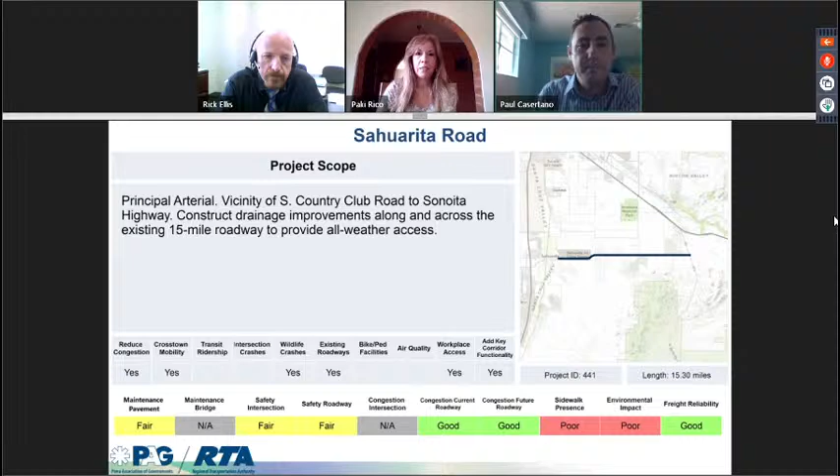The next project is the one that appears, the first one on the link that you received. This is the Twin Peaks Road Rattlesnake Pass expansion. This is a major collector project from the Saguaro Bloom subdivision to Twin Peaks Road.

This aligns with most of the CAC goals and has all but one performance measure available.

The intent of this project is to essentially improve capacity, improve the safety, the overall operations and functionality for that area, and then provide key connectivity with the new development named Saguaro Bloom that's been going in, and then connect it back to the Twin Peaks area where all those areas and roadways have been built out. So it provides a necessary connection in there, as well as addressing the capacity needs for the area.

When we look at performance measures, we see some existing condition safety issues that are in need of attention, certainly. And then as we look beyond that, we see that environmental impact intersect is a high priority there, and sidewalk presence appears to be fairly low.

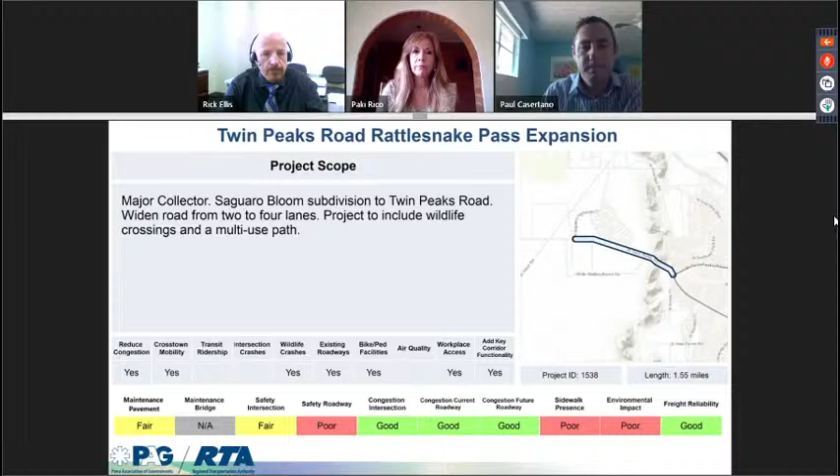Okay, the next project is Twin Peaks Road. This is another major collector from Saguaro Highlands Drive to Silverbell Road. This one is about half a mile long, and it meets half of the CAC goals, and it has about 3 performance measures that will need to be looked at.

In the prepackaged documents mailed to you, there was a 2-page assessment that had been assembled evaluating and providing some insight onto the projects, some feedback items for consideration, and questions that arose during a preliminary review performed by PAG staff.

This was one of those projects that had overlap, and as we called it out in the assessment, there were essentially 2 projects representing the same area and serving the same part of the roadway system. This is the smaller of the 2, but the overall functionality is similar to what I just reported on, with the main intent being to improve capacity, improve overall accessibility and operations of the facility, and add all the necessary multimodal and fully functional aspects. So there's just 2 of them reflecting the difference between project limits. One's a little more extensive, the previous one connecting to the western end of the development with existing intersections. This one is just a little bit smaller.

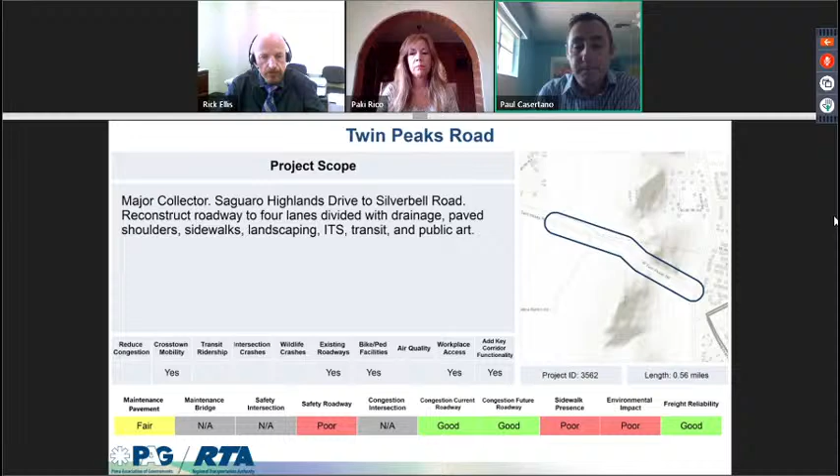The next project is Lambert Lane, a major collector project from Shannon Road to Rancho Sonora Drive. This project is almost 1.5 miles long, is aligned with most of the CAC goals, and has one performance measure that is not applicable at the moment.

As described, this project is a 4-lane roadway, so it provides all the necessary capacity, operational, drainage, and fully functional improvements and benefits that come along with that. It's basically a continuation from the roadway improvements along Lambert Lane that have been working from east to west. This is the final segment. It will connect at Shannon Road and essentially provide the full benefit of that roadway section throughout the entire length of this roadway area.

Again, we see some existing condition safety issues in need of attention, both at the intersection level and the segment level. Both of those pieces of the roadway are not really performing as well as they should and are in need of additional attention. We do see low sidewalk presence and a high intersect with environmentally sensitive areas.

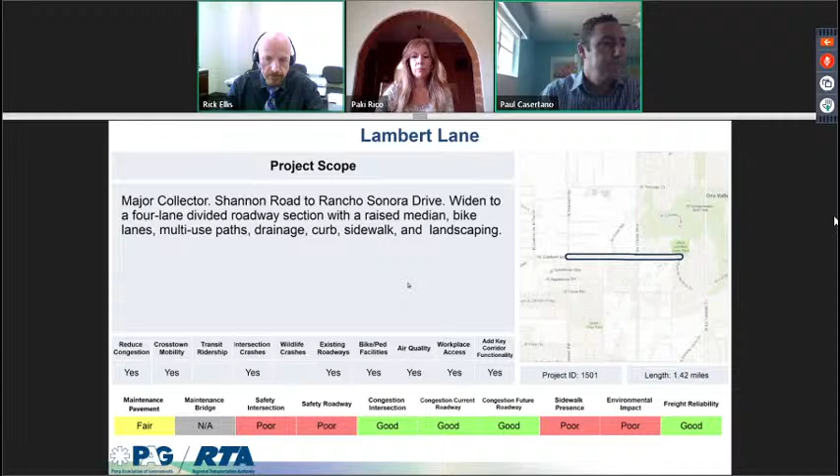Moore Road is the major collector from La Cholla Boulevard to La Cañada Drive. It's approximately 1.25 miles long, aligns with the majority of the CAC goals, and has about 4 performance measures that need to be addressed.

Paki, did we skip over Shannon Road? Was it the one previous slide? Oh, never mind, I apologize. I'll hit Moore first. Want to make sure I get it right. I'll address Moore first. Do you want to jump in and do Shannon, or do you want me to jump in and do Moore? Let's do it in the correct order.

I apologize, everyone. So next is Shannon Road, major collector from Lambert Lane to Tangerine Road. It's approximately 2 miles, aligns with most of the CAC goals, and has about 3 performance measures that are not applicable. The purpose of this project is to provide an additional connection from Lambert to Tangerine, help serve the area as it grows and develops, plus provide an additional connection between Lambert Lane and Tangerine, in addition to the La Cholla and La Cañada corridors. The northern portion of the roadway is going to be on brand new alignment, so that's included in the overall assessment and overall cost as well.

The existing condition performance does show some roadway segment safety issues in need of attention. And while congestion may not be the issue here, it's certainly something to take a close look at. We do see poor sidewalk presence in existing conditions and a high intersect with environmentally sensitive areas here.

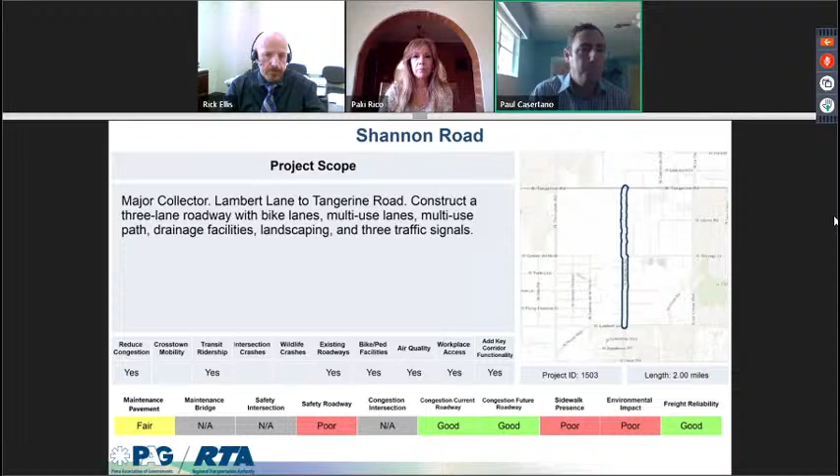Okay, now we go to Moore Road, again, a major collector from La Cholla Boulevard to La Cañada Drive. It's about 1.25 miles long, aligns with the majority of the CAC goals, and has about 4 performance measures that are not applicable at the moment.

With this project, you're going to see several others that follow a similar theme, in which the proposed project is to construct a 3-lane roadway. Essentially that's 1 lane in each direction, plus a 2-way left turn lane in the middle. The benefit is it improves overall safety and operations by allowing turning vehicles to get out of the throughway and avoid long backups, cut arounds, bypasses, and unsafe activities that you often see on a 2-lane roadway without adequate turning facilities.

Similar to many other projects, and in keeping with the common theme, there'll be the addition of drainage improvements, as well as providing all the necessary fully functional elements for bike and pedestrian use as well.

When we look at existing condition performance, we see some poor pavement quality here. That's something that probably needs a little more investigation. Again, we're just looking at the roughness of the ride; there could be more substantial issues with the substructure that the agency maintaining that facility would need to investigate further. But the available data shows us we should look a little further into that.

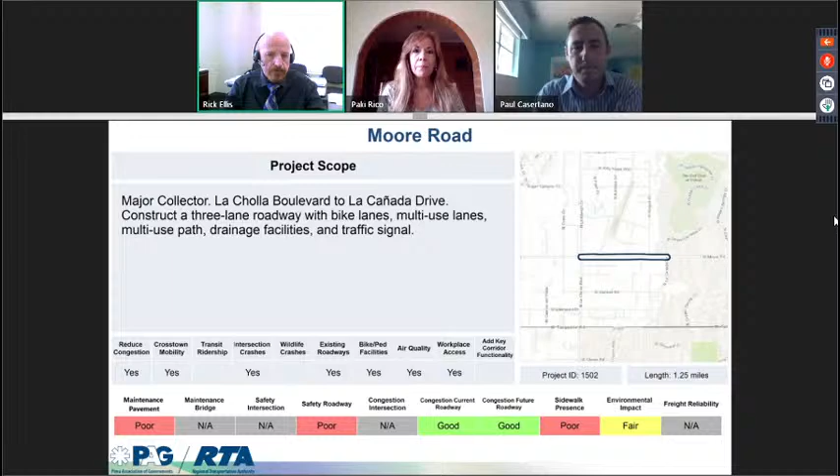Camino de Oeste, this is a major collector from Calle Turin to Valencia Road. About 1.5 miles in length, aligns with about half of the CAC goals, and Paul will go over all of the performance measures on that.

So the key part of this project, in respect for Arlen's request, I'll try to do these as much as I'm familiar with them. This particular roadway has had some improvements out there. They've been more spot and functional, dealing with certain issues or scope items. But the majority of the roadway out there is, I believe, a 3-lane section through this stretch.

But as with a number of roadways and existing streets on the southwest side, they have a lot of drainage issues. This one is susceptible to the Black Wash area coming through and overtopping the roadway on a regular, frequent basis. So the intent of this project, while it is a 3-lane section with some pedestrian facilities, is to upgrade it to a full 4-lane facility, create all-weather drainage crossings, and add all the other functional aspects for bikes, peds, and transit as needed. This will also accommodate any future development growth planned for the area as the tribal areas continue to expand.

Our existing conditions show some poor sidewalk presence currently. So while there are facilities there, additional attention is needed for the sidewalk presence.

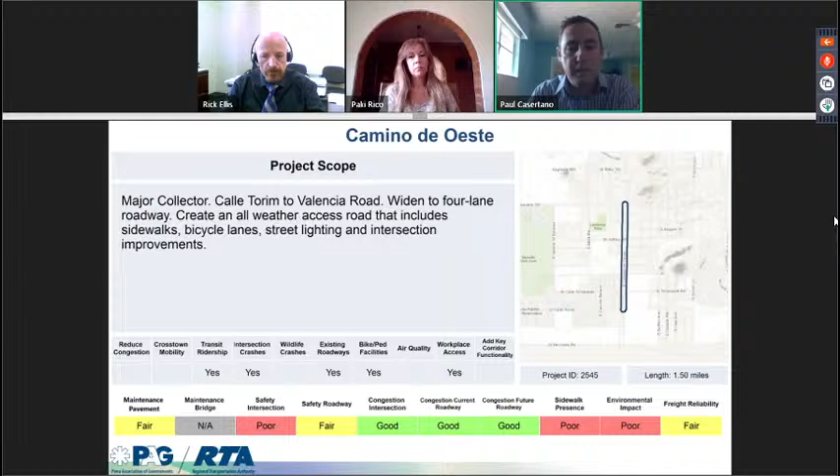When we look at safety, we're looking at the northern intersection here that's underperforming a bit. That's the Valencia intersection with Camino de Oeste, where the safety performance is a little bit in need of attention, and in relation to similar types of intersections, is performing a little lower than some of those other intersections.

Colossal Cave Road, segment 1. This is a major collector, one of two segments, running from I-10 to Mary Ann Cleveland Way. It's about a 1.25 mile long project. It aligns with most of the CAC goals, and looks like 4 of the performance measures are in good shape.

The existing setting and conditions out there are a combination of 2 lanes to the south, and then a 3-lane set of improvements along with pedestrian improvements provided through the Vail community, where it ties into Mary Ann Cleveland Way. So essentially you have a 3-lane section and a couple of turning facilities, but those were more operational, short-term in nature.

This project proposes to provide an upgrade to a 4-lane, full capacity section with all the necessary amenities and functional additions, as well as try to address the two railroad crossings, either one or both if possible, that often impact the overall operations of the facility.

As Paki mentioned, there are some good performing existing condition performance measures here, but we are seeing some deterioration on the pavement side. Safety of both the intersection and the roadway appears to need a little bit of attention, and we see sidewalk presence in the poor category as well.

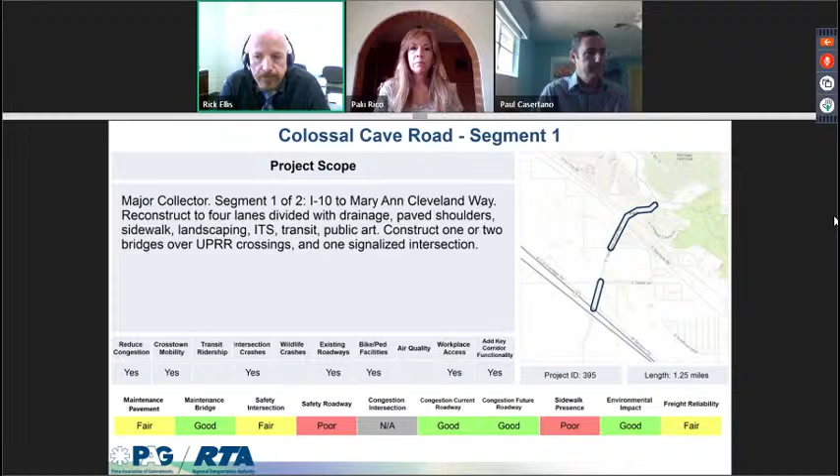The next one is segment 2 of Colossal Cave Road, another major collector, from Mary Ann Cleveland Way to Camino Loma Alta. This one's about 1.5 miles, aligns with the majority of the CAC goals, and has three poor and three good performance measures. This project could be thought of as an extension or continuation of the previous one, which is why it's segment 2 of 2. It continues the widening, the improvements, the capacity needs, and all the necessary fully functional elements northeast up to Camino Loma Alta, to address the numerous traffic issues and congestion out there, and help provide that necessary relief.

We do see in the existing condition performance data a need to take a closer look at the pavement issues out there. But I want to bring your attention also to the future roadway congestion popping up in our modeling efforts, showing some poor performance that's probably indicative of the projected growth in that area and the facility itself. So something to be considered in scoping and evaluating the project.

Thank you, Paul. And I did say 3 good. It was 4 good performance measures, 3 poor. So just to clarify.

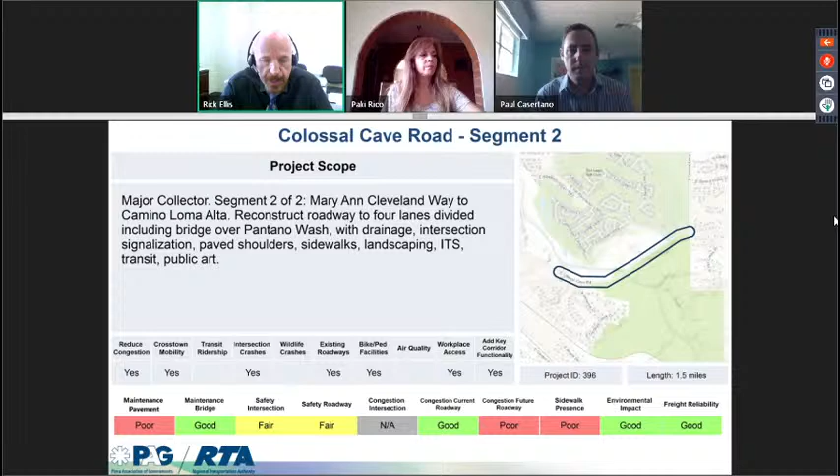So the impact fees, are they primarily just for the immediate neighborhood? I get asked this all the time, so I'm trying to get educated. In general, impact fees are collected and attributed to the bigger roadways that are more impacted. They're paid into a benefit collection area and become eligible on certain roadways, most commonly applied to bigger corridors like this. In some cases, those fees are an ongoing collection and may not be adequate to fulfill a regional project of this nature. Okay, thank you.

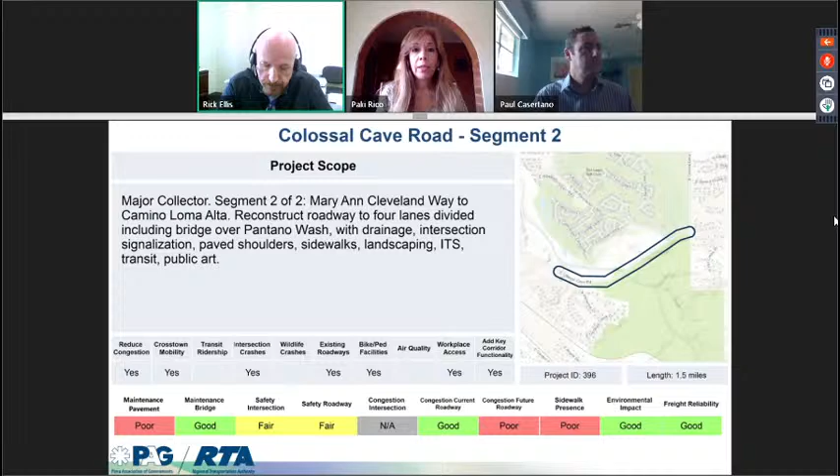The next one is El Toro Road, another major collector from La Cañada Drive to La Villita Road, about 1.5 miles long. This one is a non-existing project, but it seems to align with 5 of our CAC goals. Paul will address the performance measures a little later.

As mentioned, this is going to construct and add several sections of new two-lane roadway. It will be fully functional, addressing drainage, bike and pedestrian needs, and providing all necessary amenities to retain full operational functionality. Down in the Sahuarita community, this is part of their town center district, and it'll provide an additional east-west corridor stretching across the town's area.

Again, we're looking at existing condition performance data, so that's why we don't have existing condition performance data for this current facility—it doesn't exist yet. That's largely what you'll see showing up as those NAs, just something to keep in mind. Thanks, Paul.

Paki, this is Tom, I wanted to ask Rick about this. I'm looking at 2 screens here—one from what Paki sent said a 2-lane roadway. Oh, this still does say 2-lane. 2-lane with curb and gutter doesn't sound like a standard section except in residential areas, and I see there are a couple of intersecting streets. So how are you going to handle turn lanes on a road like this?

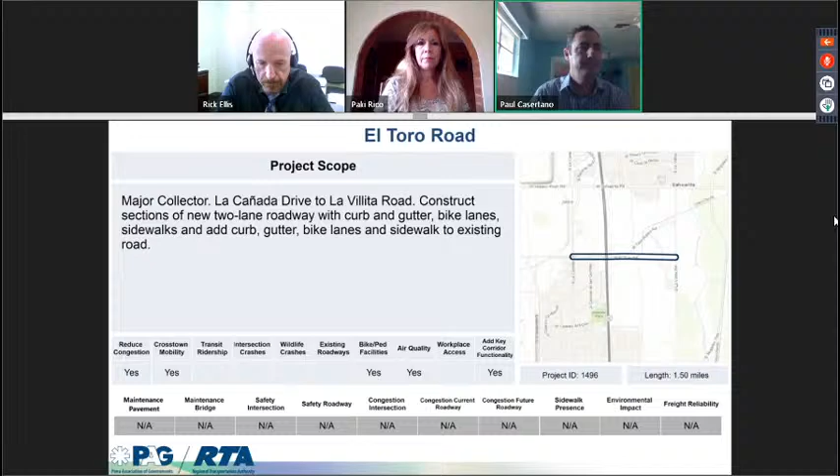Okay, moving forward, we've got Naranja Drive, major collector from La Cholla Boulevard to First Avenue. This one's about 3 miles in length, aligns with the majority of the CAC goals, and as you can see, it has 4 good and 2 poor performance measures. So as I mentioned before, several of these roadways where the existing 2-lane roadway does provide adequate capacity for the bulk of the traffic, but experiences operational hindrances in the form of turning vehicles that can block 1 or 2 lanes, depending on how that's all set up, and can create residual safety issues.

So this continues the 3-lane section. It'll have all fully functional aspects with bike, drainage, and pedestrian maneuvers as well, and make sure it provides a fully continuous section on Naranja Drive. So the existing condition out there is primarily a 2-lane roadway with several side street accesses. That's the need for the 3rd lane or the 2-way turning lane.

We do see some existing condition safety performance that is in need of attention for the segment itself. The intersections are performing at a fair level just thus far, but certainly you're going to want to look at that in comprehensive evaluation to look at both the roadway segment as well as the intersections.

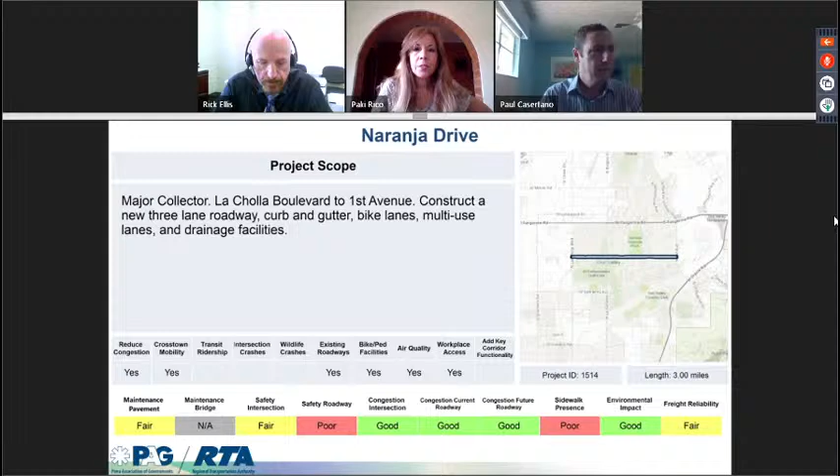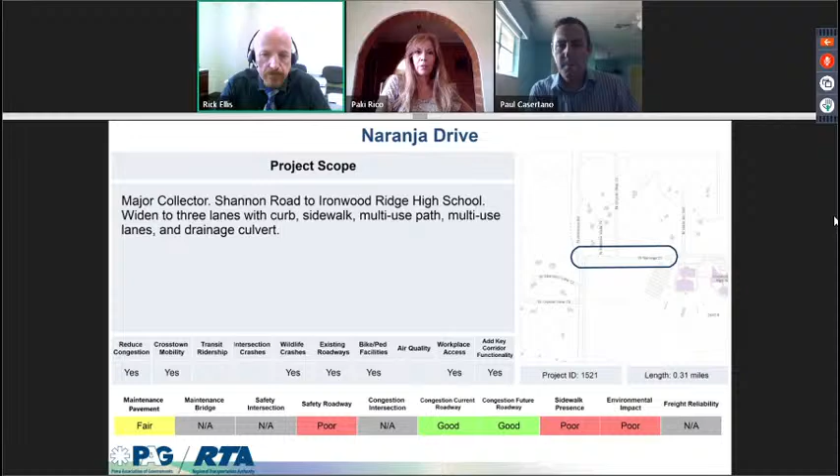The next one is Linda Vista Boulevard, a major collector from Calle Buena Vista to Oracle Road. The majority of the CAC goals are in alignment here, and it's got a majority of good performance measures, one poor, and one that needs to be assessed.

As I've mentioned, you're seeing the common theme now on several of the roadways being talked about today. This one proposes a 3-lane section. Calle Concordia is seeing a lot of traffic, and a lot of traffic avoids Calle Concordia and uses Linda Vista Boulevard instead. As traffic continues to grow, turning maneuvers and accessibility from side streets becomes a key issue that gets exacerbated over time. So in addition to addressing that, this will provide all the other necessary elements to ensure a fully functional corridor.

When we look at existing condition data, we do see some emerging issues related to pavement maintenance as well as intersection and segment safety. Those appear to currently be gravitating toward the State Route 77 Oracle Road east end of the section, but certainly something to take a closer look at.

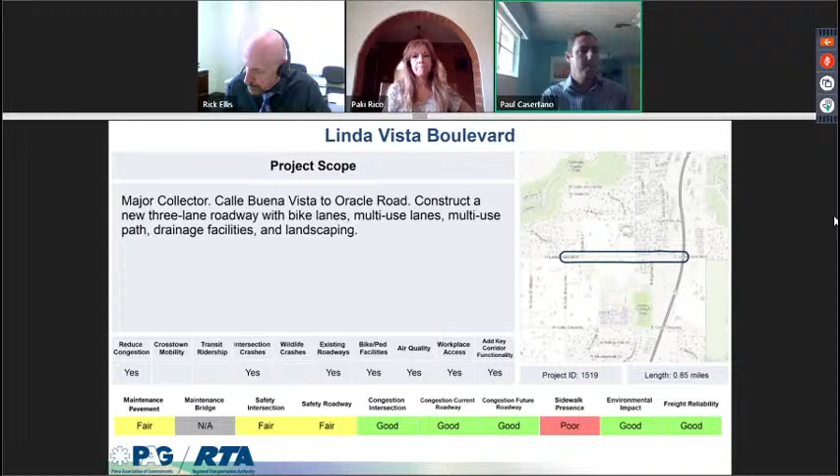There's a second Linda Vista Boulevard project, also a major collector, from Hartman Lane and Blue Bonnet Road to Thornydale Road. This one is about 2 miles long. It meets about half of the CAC goals, with 4 good performance measures and 4 poor performance measures.

This project is now going to be a true capacity enhancement, proposing 4 lanes with all the necessary amenities to address the ongoing growth, development, and activity up there on the northwest, as well as provide key connectivity. The interchange to the west is at the Twin Peaks area, built as part of RTA 1, and there are planned extensions or connections over to Shannon Road on the east side.

John, to the questions you had received earlier, this project was called out in the assessment as possible for consideration to extend it to the west. The 2 jurisdictions involved would be Pima County and the town of Marana.

We see some existing condition issues around pavement, largely on the western section, but the eastern section is deteriorating as well, just not quite as quickly, according to the roughness index. We also see some safety performance issues for both roadway and segment with this facility. We're in an environmentally sensitive area—again, not a barrier per se, but something to be considered—and we see poor sidewalk presence for the facility that exists today.

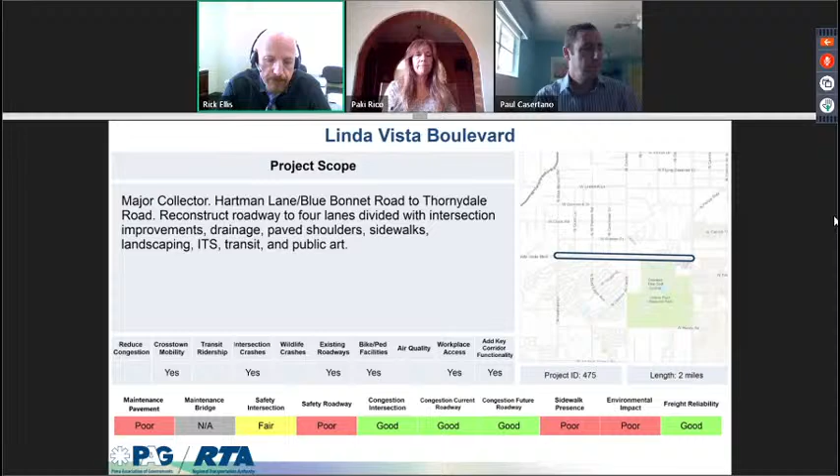The next project is Los Reales Road, another major collector from Sheridan Avenue, known as Ignacio Baumea, to Camino de Oeste. This is about a mile in length. It meets half of the CAC goals and does not have any performance measures at this time. As I mentioned before, this is down on the southwest side. This roadway is an existing 2-lane roadway, but it provides an awful lot of relief to some of the other facilities there that service the tribe. So upgrades, and also accommodating any future development planned for the area, are needed to address the traffic and operational issues, as well as the drainage I talked about earlier for Camino de Oeste.

So this would provide that 3-lane facility, fully functional, with all the necessary drainage, pedestrian, and bike amenities as well. The majority of this does not contain existing condition data, so that's why you're not seeing categories here for these data performance measures.

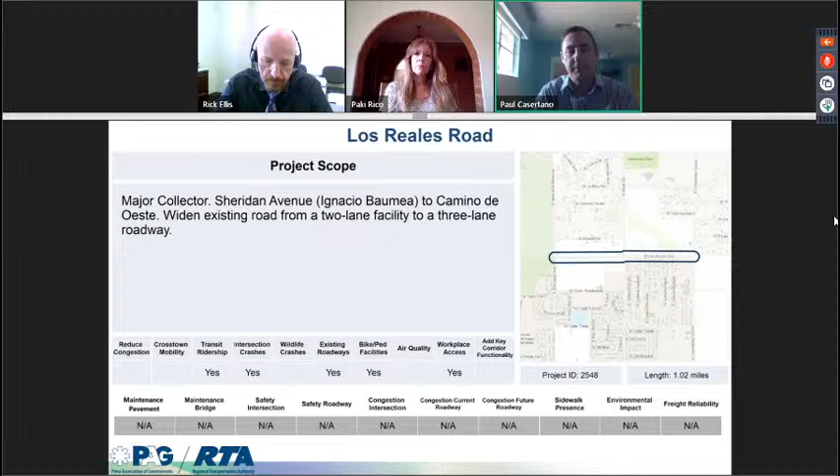Kinney Road is next, a major collector from Ajo Highway to Bopp Road. This one's about half a mile, and it aligns with the majority of the CAC goals. It's got 2 good performance measures and 5 poor. This project is to once again improve the capacity, provide the full functionality in the form of all-weather crossings, take care of the drainage issues, and improve the multimodal aspects of it as well. While there have been a number of smaller improvements out there, it hasn't been the whole collective approach to the whole corridor. Essentially the others have been part of larger projects. This has the chance to bring it in with one complete project.

So we see existing condition data showing issues in pavement. Recognize that we're looking at 2015 through 18 roughness index, so it may not be quite up to date, but there are still issues that need attention there. And then we see some flagging performance both at the intersection level as well as the roadway segment itself. We do see some future roadway congestion for the non-built 2045 network for the existing facility as it is today, and poor sidewalk performance.

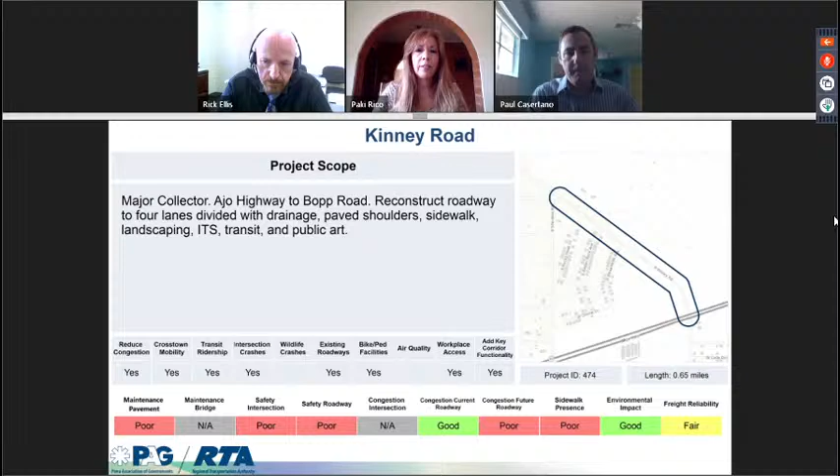The next one is Drexel Road, major collector from Cardinal Avenue to Mission Road. This is about a mile long, aligns with the majority of the CAC goals, has 3 good performance measures and 5 poor.

So this facility is mostly an existing 2-lane roadway, probably a combination of graded or slightly paved shoulders. So the idea, as we've been mentioning, is to put in a two-way left turn lane, then address some of the drainage issues and make sure that the appropriate bike and pedestrian facilities are added as well. Basically to address the overall operations, accessibility, and safety aspects of that.

Indeed, we see existing condition showing pavement in need of attention, as well as safety at both the intersection level and the segment level. And as Rick mentioned, sidewalk presence is in need of attention. We are in an environmentally sensitive area, so there is a high intersect there. So that's why that environmental impact score shows as poor.

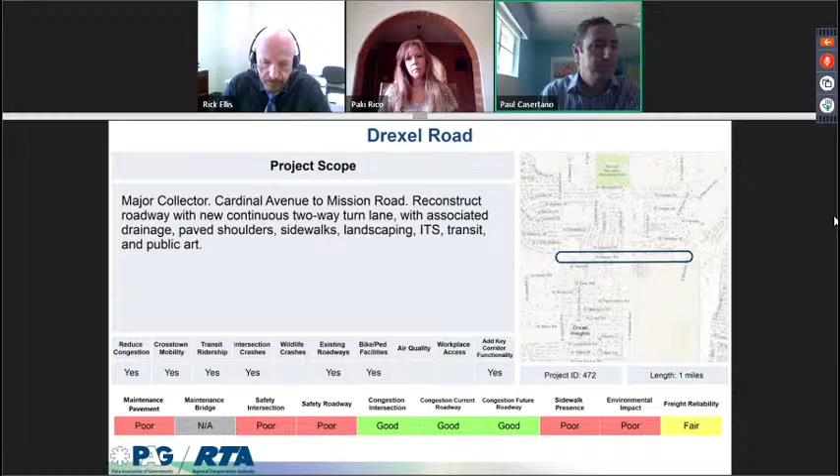Next up is Northern Avenue, Calle Buena Vista. It's a major collector from Magee Road to Linda Vista Boulevard. It's 2 miles in length, aligns with half of the CAC goals, has 4 good performance measures and 3 poor.

So this is another corridor where we're seeing an awful lot of traffic, some of it diverting off of Highway 77, some of it accessing the CDO High School up in the area. So it gets a fair share of vehicular traffic as well as bike and pedestrians. In addition, it also has a number of at-grade drainage crossings as well. So the project would then address that and provide the full 3-lane facility, all the necessary functional amenities, and take care of all those deficiencies at the same time.

Existing condition performance shows need to take a look at pavement maintenance, certainly. And then the segment largely to the north is underperforming a bit. We do see some fair performance at the intersection level, but I think the entire corridor could serve to have some more attention there. And then we see poor existing sidewalk presence as well.

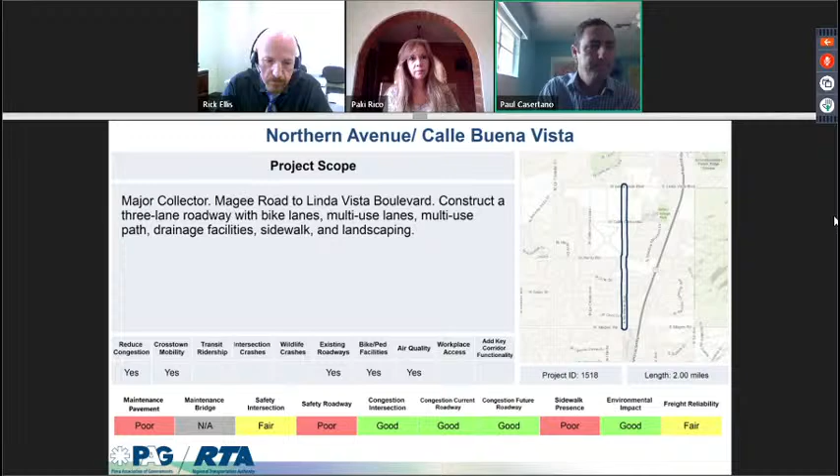Marianne Cleveland Way is next, major collector from Vista del Lago to Colossal Cave Road. It's about 1.7 miles in length, aligns with more than half of the CAC goals. It has 2 good performance measures and 3 poor performance measures.

So this project can be thought of as the western companion piece to the Colossal Cave improvements that were described earlier. So this essentially now goes west of Colossal Cave, goes through all that development area where the schools are, and the 4-lane capacity sections needed to handle all the extra increase in traffic that's been seen out there, as well as address the operational safety and drainage concerns that are associated with that area as well.

To the point that was brought up earlier, this project was identified in the assessment as a possible consideration to extend it further to the west to match into Houghton Road. And the 2 jurisdictions out there are Pima County and City of Tucson.

So existing condition performance shows pavement again in need of attention, as well as the roadway segment itself is underperforming from a safety perspective. We do see a little bit of slippage in the intersection level safety performance that could use some attention as well. And then the sidewalk presence in the current condition is poor.

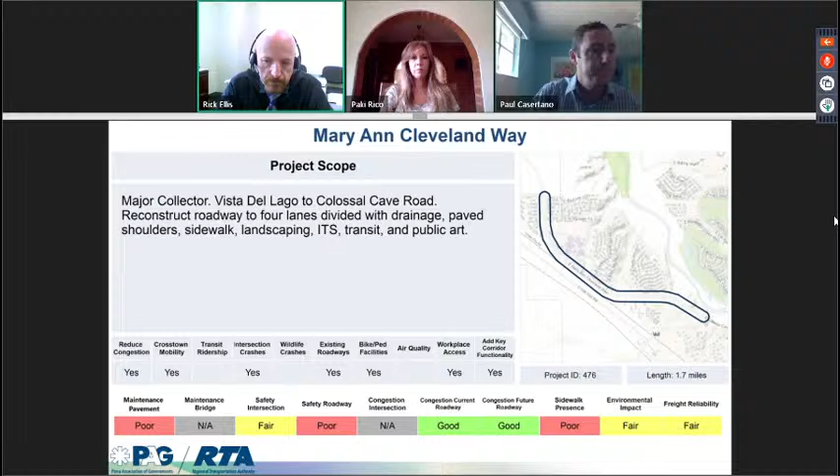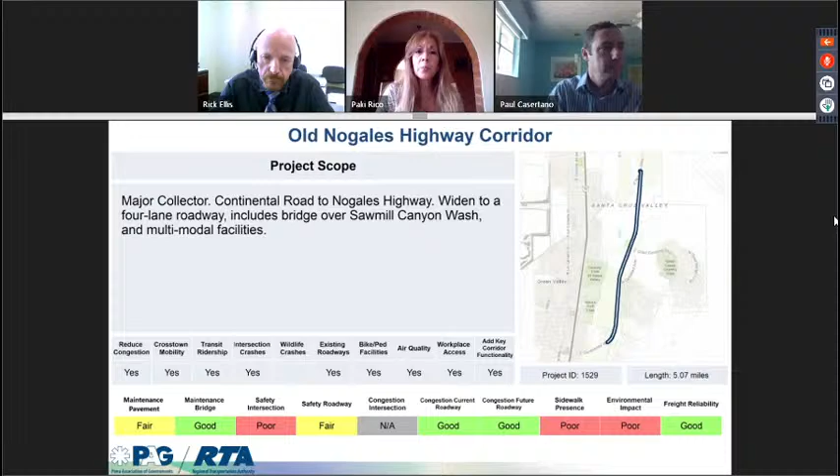Okay. Any other questions on this? I believe the next project is one that we switched, so you may not find it on your list.

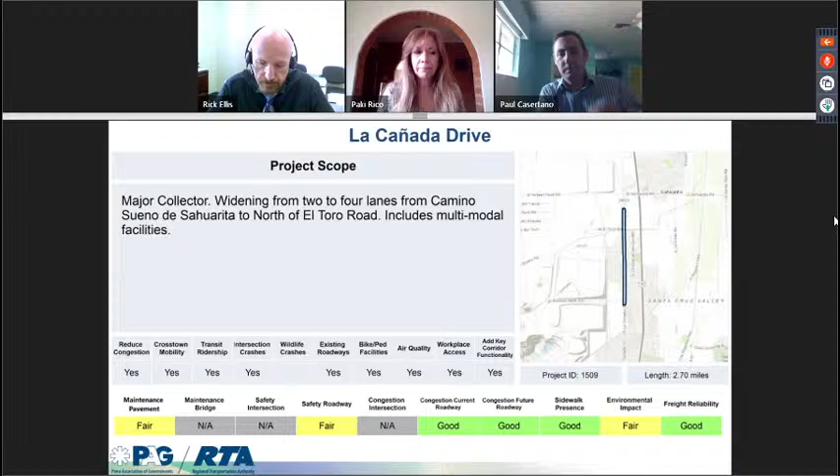What's that little jog there that connects? Is it Rita Road at I-10? I believe that is Rita, that is west of Houghton, correct? I believe that's the next one up. Yeah.

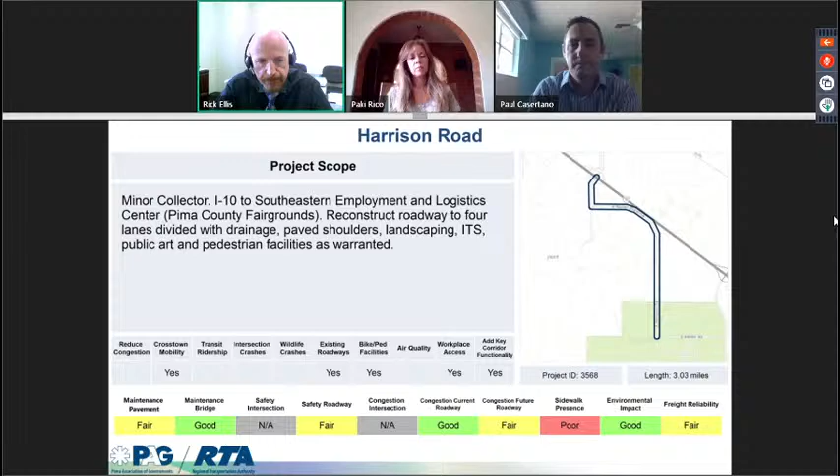Mr. Chair, this is Kevin Farnton. I just want to let you know, Rick, Palisades recently got a multi-use path on the north side of the road, all the way from First Avenue back into that development. Back on the north side, you said? Yeah, north side of the road. Okay, right.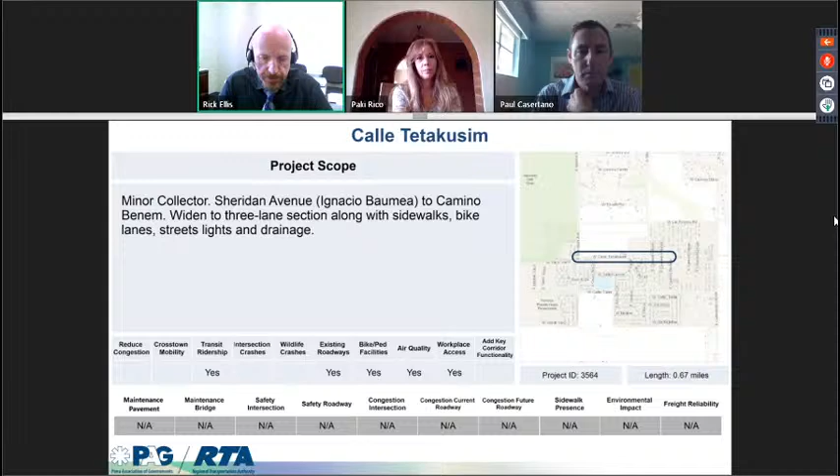Similar to what I described earlier with Los Reales, the existing roadway out there is primarily a 2-lane roadway, but there's a lot of open vacant parcels and expected development coming on behalf of the tribe. In anticipation of that, and to ensure that the roadway is functional and serves the area adequately, and addresses all the drainage concerns, a full 3-lane section is proposed to accommodate all that, provide the necessary mobility, and ensure safe and effective operations. No existing condition performance data is available for this facility at this point.

This is Arlen. These several that are near the Pascua Yaqui area and historic roads that were there oftentimes before, the flood, taking care of the flood control issues on these roads without causing backup problems to the south. I'm just, if they're going to be built to pass the 100-year standard, it's going to be a much higher road than everything else around it.

And Arlen, to your point, I think that's going to be part of the refinement process if this project makes it through, working closely with the sponsors to make sure we look at effective and adequate ways to accommodate that, plus minimize the impact. That becomes a real trade-off as to when you raise something and cause a lot of problems versus letting the water overtop that. It's acknowledged that's going to be a significant challenge, as all the roadway projects addressed in that area have experienced.

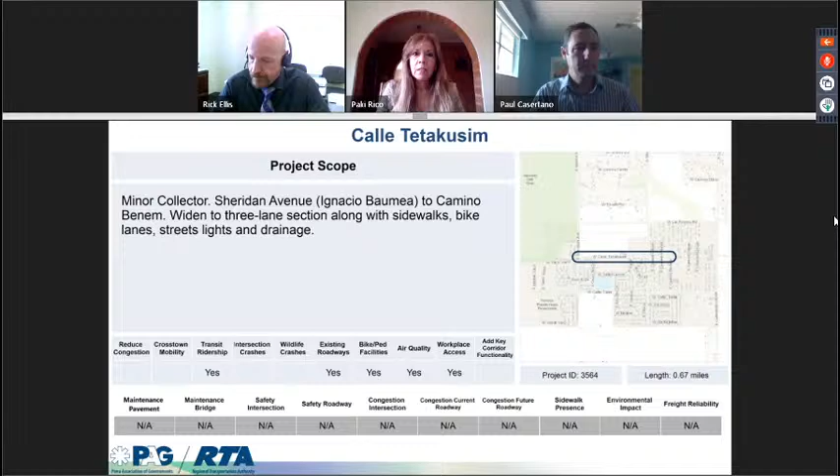The next one is La Villita Road. This is a minor collector from Sahuarita Road to Nogales Highway, a little over 3 miles in length, aligns with most of the CAC goals, and does not have any performance measures at the moment.

This roadway extends the existing roadway, which is mostly a 2-lane facility that only goes part of the way. This continues it all the way down and adds the necessary bike and pedestrian amenities throughout the entire length, so full connection to the major south end, north end corridors is achieved, as well as full functionality throughout the length. This is also part of the town center efforts going on within the town's limits.

As Paki mentioned, no existing condition performance data is available for this facility.

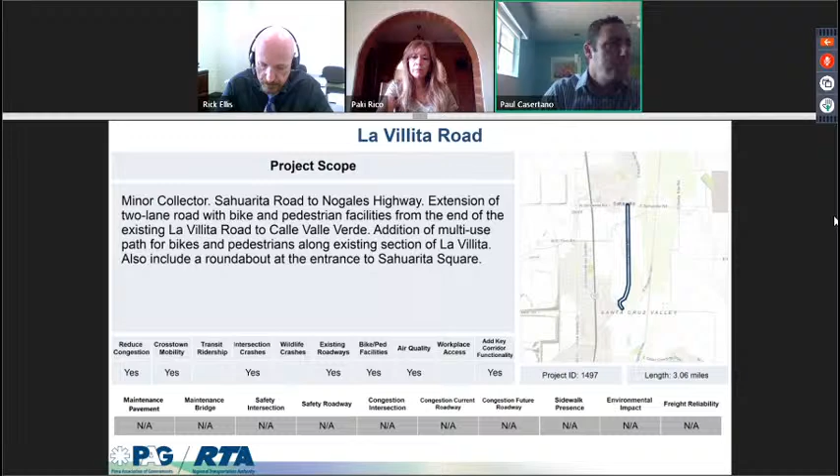Desert Fairways is next, another minor collector from La Cañada Drive to Hidden Springs Drive. This is under 1 mile long, aligns with most of the CAC goals, and again, no performance measures on this one.

As you see more of these minor collectors, it's not a surprise that we won't have existing condition performance data for some of these facilities. So bear that in mind.

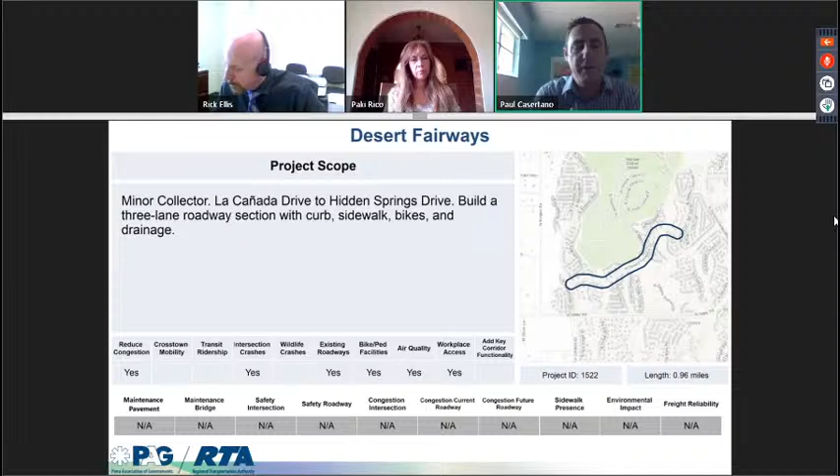This next one we switched — now we jumped to Sonoran Corridor. The Sahuarita project used to be here, we moved it, as you saw earlier. So the Sonoran Corridor is what we're putting into our to-be-determined category.

New facility, new limited access roadway connector between I-19 and I-10. This is scheduled to be about 13 miles in length and aligns with about half of our CAC goals.

As Paki mentioned, this is where we introduce a new designation, TBD, and several of the remaining projects will fall within that categorization. It's not all inclusive, but it was intended to give us a place to capture these types of roadways. First, brand new alignments where there's no existing data or existing roadways, so we can't fulfill or classify anything. Second, this designation also reflects projects submitted that may be considered more singular purpose, singular focus — they don't have the full range of necessary improvements while still providing a necessary benefit, more a single way of getting there. And lastly, any roadways on a lower classification than a minor collector, as Paul talked about a few minutes ago. So the remaining projects that fall into that TBD category encompass those types of roadways, those types of proposed projects.

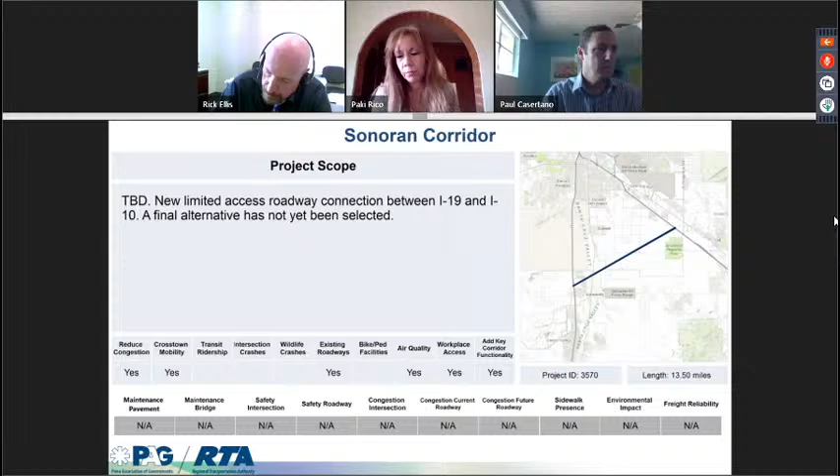The next one is the Dove Mountain Boulevard extension. From here forward, these will all be under the TBD category, to be determined. This is from the western terminus of Dove Mountain Boulevard to the eastern terminus of Cochie Canyon Trail—a little over 4 miles in length. It aligns with two of the CAC goals, and obviously there are no performance measures at this time. The intent and purpose of this project is to provide additional connectivity and accessibility coming in from the north end into the Dove Mountain area and its development. By providing this connection, it also helps alleviate potential pressure as growth and development continues, and helps preserve the capacity of the Tangerine corridor, which is part of RTA 1.

Paul, I don't know if you want to add anything to these. Nothing really to add here—new facility, no existing condition performance data.

This is Arlen. I have a question. The map ends before Cochie Canyon Trail, perhaps intersecting with the frontage road of I-10. I'm curious what happens, since this appears to bring it out into what looks like a residential street—a local residential street—unless it's designed to be a collector arterial or something. I don't know the standards for the existing Cochie Canyon Trail as it goes through the subdivision, and then where it connects to the freeway, or if there's a proposed connection to the freeway there.

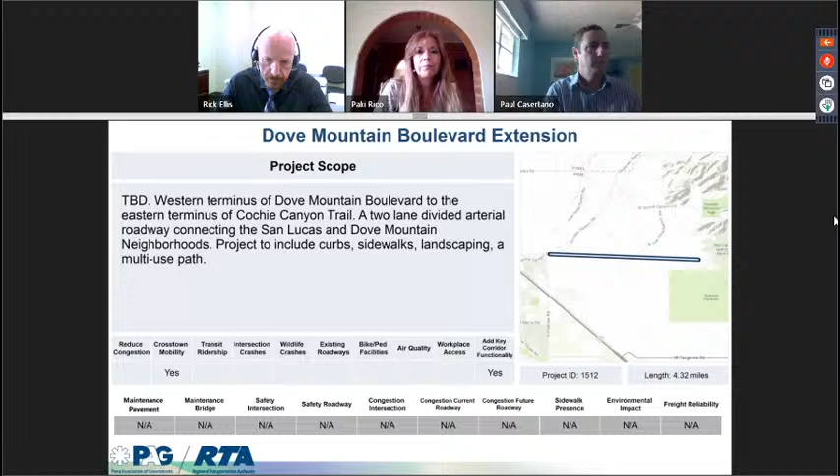Palo Verde Road. This is from Bilby Road to 44th Avenue. This is a little over 3 miles in length, aligns with most of the CAC goals, and most of the performance measures are good on this one.

So the existing facility out there is a multi-lane roadway. However, there is a lot of traffic out there, a lot of access points, a lot of commercial business centers, as well as a lot of stop-and-go type activities and generators, as well as a lot of bike and ped activity along the corridor, and transit facilities there also. So the upgrade would then provide the necessary full functionality of that corridor along that length. Existing conditions do show a little slippage in pavement as well as intersection safety. We do see poor safety rating of the roadway segment itself and low sidewalk presence as well.

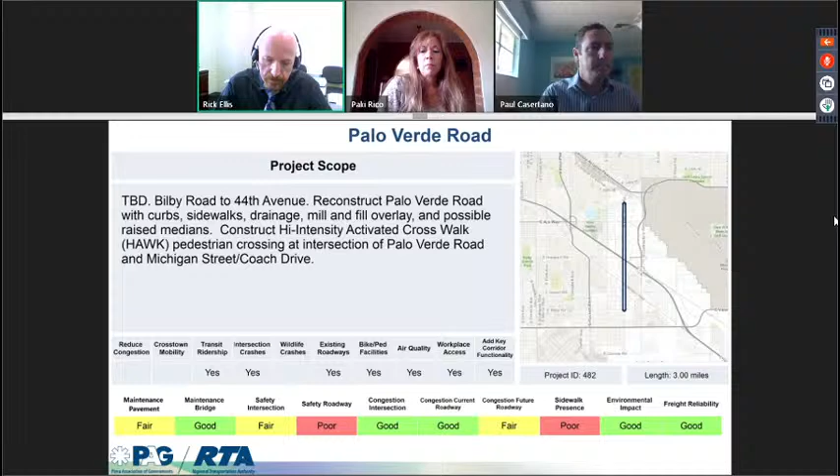40th Street is next. This is from 4th Avenue to 6th Avenue. This is under a mile in length. It aligns with half of the CAC goals. It has 3 good performance measures and 1 poor.

So primarily, this is just a single lane access road right now that abuts the southern end of a neighborhood and the commercial center in there. And the intent on that would be to improve the connectivity and the accessibility, as well as the walkability, and enhance the overall area that goes through there. So essentially it would provide now a good alternate route that would be fully functional in its intent. While this is a fairly short segment, we see pavement segment safety and sidewalk presence in need of attention.

This is Arlen. You said a single lane street? Not right now, yeah, it kind of serves, there's no dividing striping or lane out there. Appears, based on width, that you could probably get a couple of vehicles to pass, but it would be tight. So I consider that more functionality as a single lane facility where it allows two-way traffic. But is it paved? It doesn't have any of the single striping or the center line striping or dividing that you would typically see on a normal 2-lane roadway.

Is it paved, and is the same situation on 40th Street to the west of 6th Avenue? It is paved as far as the existing condition, and west it is primarily a back access roadway for several of the businesses in that area. I'd be stepping out of my bounds if I described it any better than that.

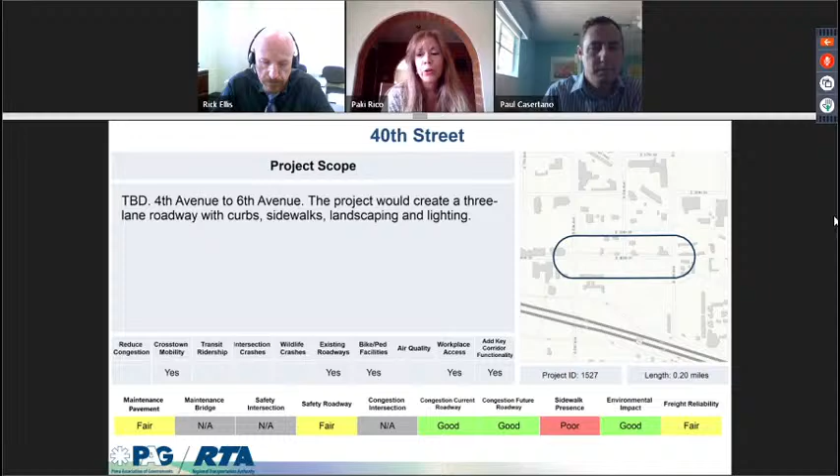Next we have La Cholla Boulevard Extension. This goes from Tangerine Road to Oracle Junction. It is 10 miles in length and aligns with half of the CAC goals, no performance measures. So this would be a brand new corridor. It's been in the long range corridor plans for a while. As growth and development continue up in northern Pima and the community Catalina and southern Pinal County, improvements on Highway 77 may warrant additional capacity needs in the future, thus prompting the desirability for an alternate corridor that would better serve the area. So it would be done in conjunction with the ADOT effort, and that's essentially how it's being proposed.

New proposed facility, no existing condition performance data.

Mr. Chair, this is Carolyn. This one is a real surprise, that's been talked about and thrown out or thrown in the trash can many times. But I did want to ask, who was this from, Oro Valley or from Pima County? Whose proposal is this? The project sponsor on this one is Oro Valley, Carolyn. Thank you.

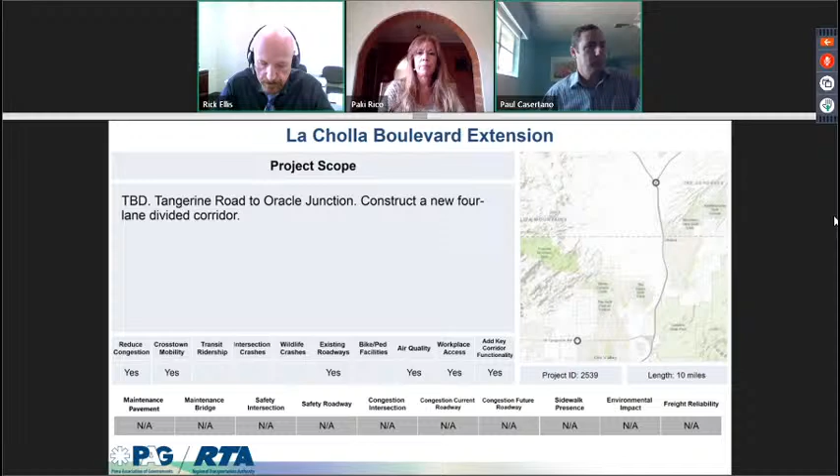Next we have Avra Valley Road Extension and I-10 traffic interchange. This is constructing a 2-lane road with a new grade separated traffic interchange over the railroad tracks. It's a little over 2 miles, aligns with most of the CAC goals, new facility, no performance measures. As you're hearing, the common theme with these new alignments, new roadways, new extensions, and new connections, the primary driver is additional connectivity, accessibility, and helping preserve the capacity of the main facilities that have already been widened, improved, or built. So it allows adequate alternative options and ensures that the overall grid system functions as best as possible. Again, new proposed facility, no existing condition performance data.

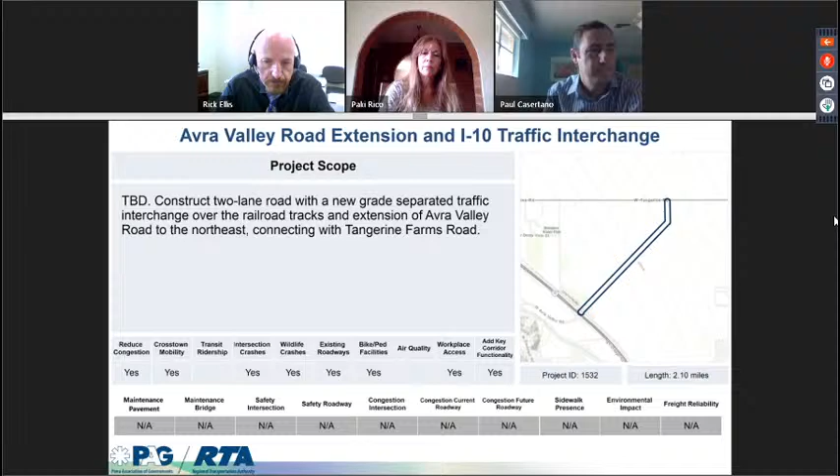Next we have the Snyder Road Bridge. This would construct a new bridge on Snyder Road over the Sabino Creek. This is under 1 mile in length, aligns with most of the CAC goals, and no performance measures.

Sorry, this is Tom just making an editorial comment. This one almost ended my career as an engineer 15 years ago. Yes, this one was submitted by Tom under the guise of a pseudonym, which I don't remember, with a different acronym, Tom Engineering Company.

Yes, Snyder Road has been around for a while. This is a proposal, as many of you are probably familiar with, to build the bridge facility and connect the east and west side across Sabino Creek. The primary driver is to provide connectivity as well as an alternate route in addition to just Tanque Verde, which is the only facility that connects the east side and the west side across Sabino Creek. No existing condition roadway or bridge, so no data there.

Mr. Chair, this is Dale Calvert. This was a major discussion in 2005, 2006. Spent hours and hours on it. Basically it was spearheaded by the Board of Supervisors, and I recognize the Board of Supervisors is completely different at this point. But is there real interest on this from Pima County at this point? Are they willing to really think about this? I think there was some concept of the project at that time of a bridge that was much longer than actually needed to get over the area to support wildlife, and I think there may be some changes in attitudes from environmental groups on that. Has there been any discussion about that, or is that just to be determined?

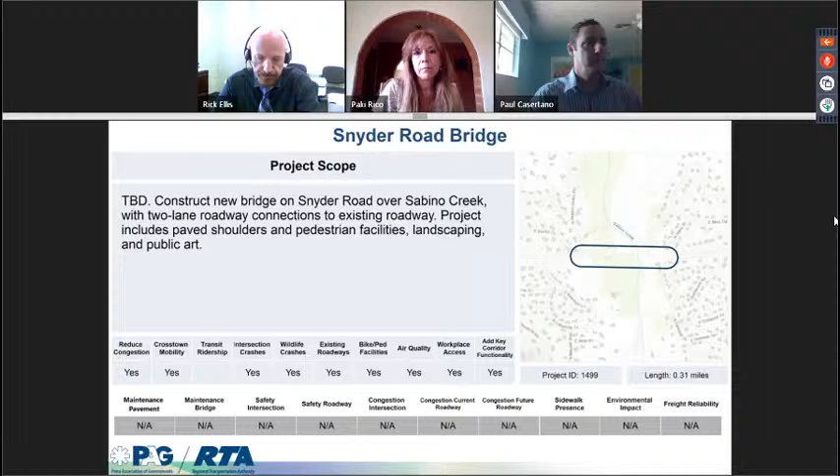Quail Crossing Boulevard Extension. This is from Nogales Highway to Old Nogales Highway, over a mile, about 1.75 miles, and aligns with most of the CAC goals, with no performance measures at this time. This is a new roadway and bridge crossing over the Santa Cruz, being driven by a lot of the development activity, the need for connectivity, as well as some commercial development planned down in the community in that area. So this would be to design and construct the ultimate configuration down there, spanning the Santa Cruz River in the appropriate configuration.

Nothing to add here. New facility, no existing condition performance data.

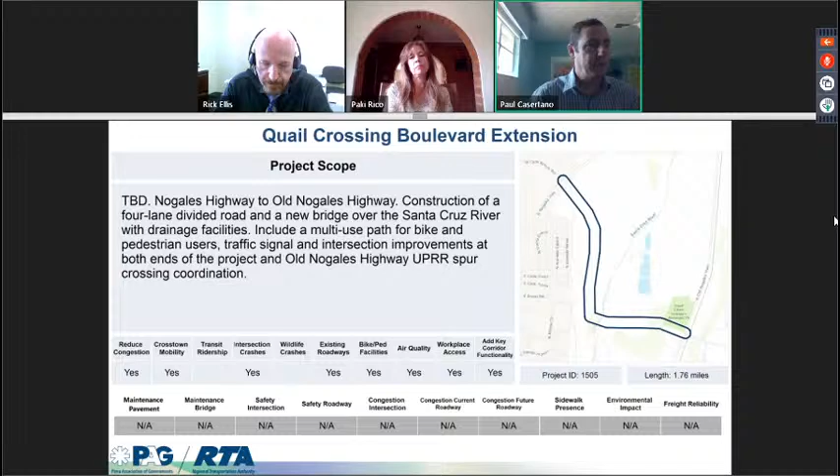Campbell Avenue. This goes from Quail Crossing Boulevard to Sahuarita Road, about 5 miles long, aligns with almost all of the CAC goals, and again, no performance measures. Similar to what you've been hearing all along is accessibility, making sure that alternate facilities are provided to ensure capacity and operations are met on the existing facilities, in conjunction with the anticipated growth and development out there. Proposed new facility, no existing condition performance data.

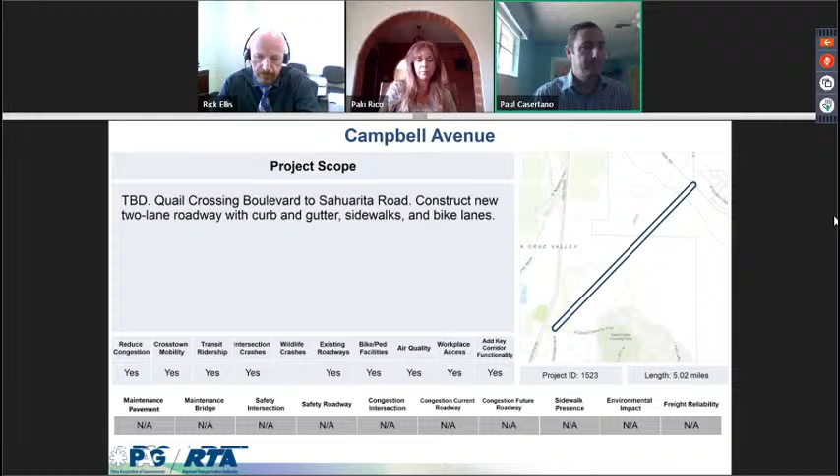This next project is different than on your sheet, even though it's La Cañada. This is La Cañada Drive as a TBD, and this is what we're saying is being reserved for discussion on future categoricals. This is from Cañada Hills to Community Center Drive, the pedestrian facility. It's under a half mile in length. It aligns with one of the CAC goals. It has 2 poor performance measures and 4 good ones.

So as I mentioned when I was describing the TBD categorization, one of those was to include a grouping for those that may be just targeted on one specific scope element or one specific type of improvement. So that's why this is reserved for that discussion.

This has been a project that's been identified for a while. The west side of La Cañada currently lacks any kind of pedestrian facilities, yet the La Cañada corridor experiences a high degree of pedestrian and bike activity throughout the whole length. So at this point in time, any users out there have to cross over La Cañada to get to the east side. Bear in mind, as you look at the buffer around the project area, we are pulling data from the existing facility of La Cañada Drive.

While some of it may not necessarily be exactly pertinent to the pedestrian facility project, it's certainly good to have for reference as well. And again, the other La Cañada project was moved to under the major collector category. They were together before, but they're separated so that we can group them.

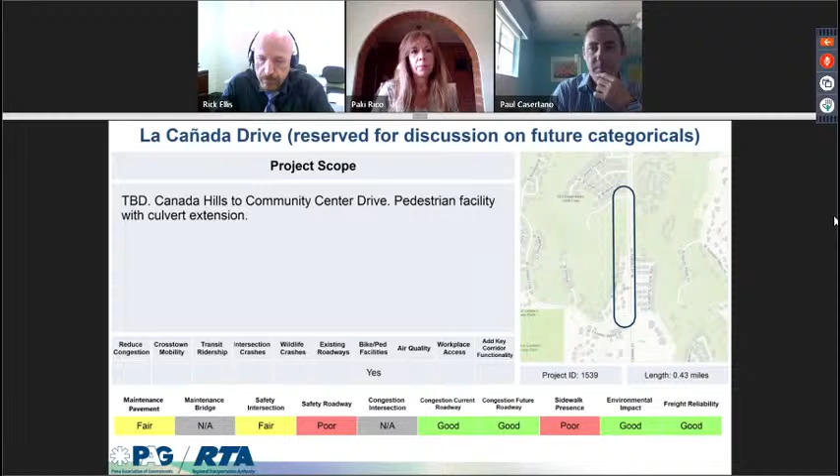The next one is the 4th Avenue Heritage Trolley. Again, this one is reserved for discussion on future categoricals, as Rick explained. This was mistakenly written as a major collector, but it's categorized as a TBD, and it goes from 26th Street to I-10 Frontage Road. It's a little over a mile in length, and it aligns with 3 of the CAC goals. It has 3 poor performance measures and 4 good performance measures.

So the primary driver on this project is basically to enhance the economic development opportunities along 4th Avenue between 26th Street and the I-10 frontage road where it dead ends. That's basically through the South Tucson Entertainment District, so it provides nice growth opportunities for that kind of enhanced economic and commercial development.

So the existing condition performance data does show some safety issues that are in need of attention, as well as poor sidewalk presence of the facility. Pavement appears to be heading in the wrong direction, so need of attention there as well.

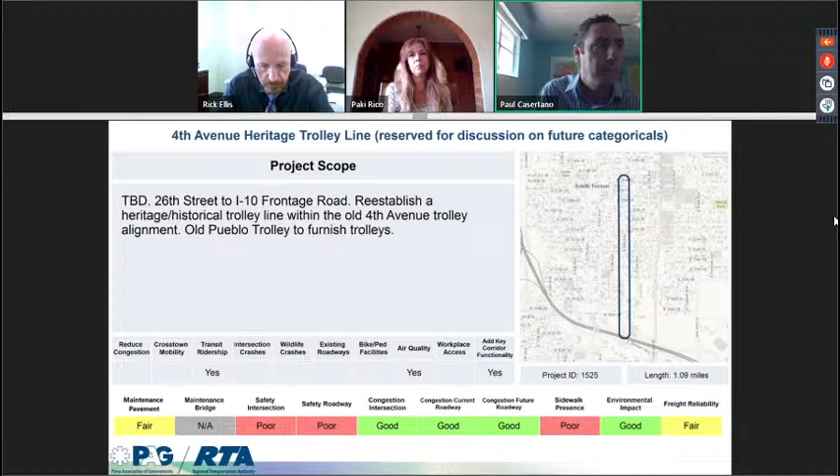So the existing facility is primarily just a 2-lane neighborhood route. It is served by transit, but it lacks any kind of pedestrian or bicycle facilities you can find out there. So essentially the intent is to then improve the pedestrian connectivity and allow it to better serve the neighborhood area.

No existing condition performance data for this facility. Just a note to remind everyone, it looks like this one, along with a couple of the others, may end up as categorical, be considered not in these major roadway projects.

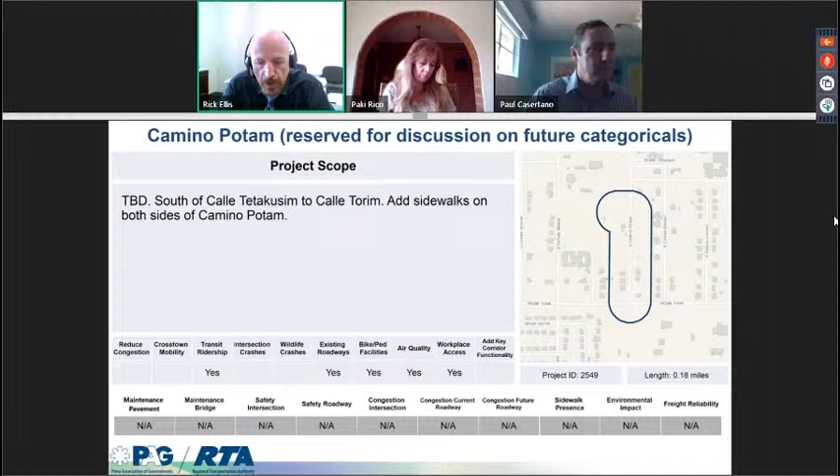As I've been mentioning, if this project survives and moves on through the refinement effort and into the ones that will require a little deeper analysis, a little further dive and evaluation, those will be items we look at as, are there more appropriate project limits that are better served, better reflective? We've identified some of those in the assessment document that was provided to you, but others, anything surviving on that would go through that same evaluation.

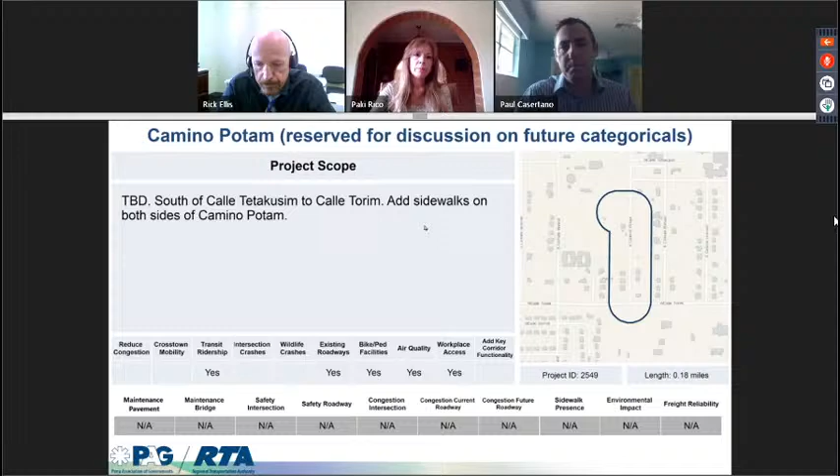The next one, I think it's the last, is 10th Avenue. This is another reserved for discussion on future categoricals. It goes from 33rd Street to 42nd Street. It's less than a mile, about half a mile in length, aligns with about half of the CAC goals. It has 4 performance measures and 2 poor ones.

So this is a situation where you have 2 recreational pathways in the form of the El Paso & Southwestern Greenway that's been undergoing a series of improvements, and then the Chuck Huckleberry Loop that's down the Julian Wash. This would simply provide a pathway to ensure functional connectivity as well as safe and effective location for bikes and peds to use getting between those 2 recreational facilities.

Existing condition performance does show some poor pavement. Within the safety category, there are issues involving both cyclists and pedestrians underneath that roadway safety designation. So certainly something to keep in mind.

I'm going to go back to something, if I may, Mr. Chair, that Arlen mentioned, and I think this would apply to other projects as appropriate by the CAC. We did identify some of the ones that had more possibility for a project extension or a different project ending point or project limits. While we did just a few of the ones that stuck out, they're certainly open for discussion and refinement as the discussions go forward, so that if more appropriate end limits are suspected, identified, or wish to be suggested or recommended, then those would be incorporated into our efforts as well.

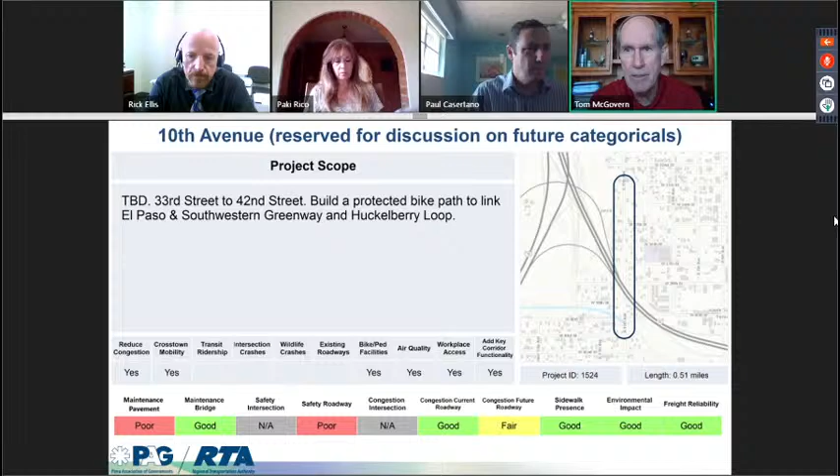We're going to just short circuit our last agenda item here and ask if Paki can give us a summary of our path forward from here.

Okay, I actually had another 45-minute presentation to do, which we'll need to table for next time. But just in a nutshell, our part of the homework that you received, we were going to review and discuss the alignment of the proposed project with the CAC's adopted goals. I know a lot of you had questions on how that works, and really what we were going to do is talk to you about the process and how we got to the CAC adopted goals. That was going to be the first half of my presentation.

And the second half is to start looking at, in the groups that you saw today, for example the freeway interstate projects or the collector projects, which are the most aligned with the CAC goals? Do they align with the survey results, which is something I was going to go into today? And then, do you think voters would consider them as an important needed improvement? So those are the three topics I was going to try and facilitate for each of the groups of submitted projects. I can go into that in more detail next time.

That's great. And if any of your presentation is something that you want us to look at before next meeting, in order to get through it quickly. Sure, I'll try and send some work.